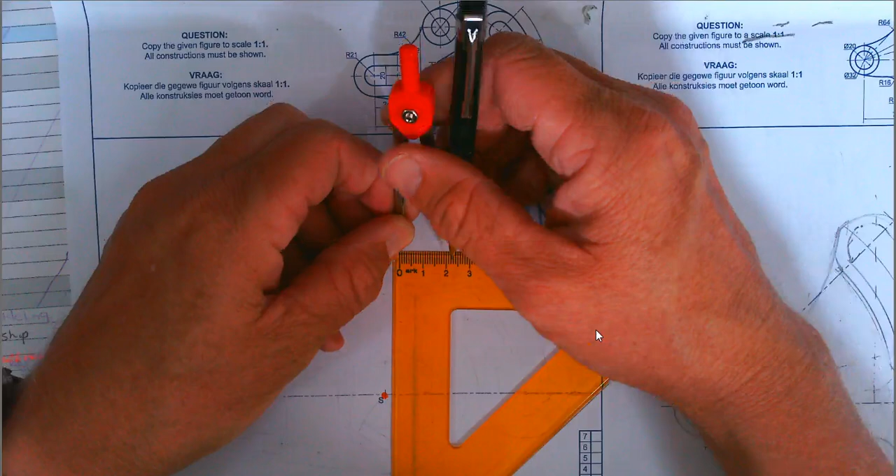Okay, not any other measurement. It must be 25. Okay, that's how you draw a hexagon. Okay, so put my compass there, draw a circle, construction line.

Know this construction, then it needs to start there on the tip. Okay, or at the bottom. So I am going to need a center line here. Guys, you have to mount this on your drawing board. Just for the space that I have here, I don't use a drawing board, but I use 2 triangles. But you have to draw this on a drawing board.

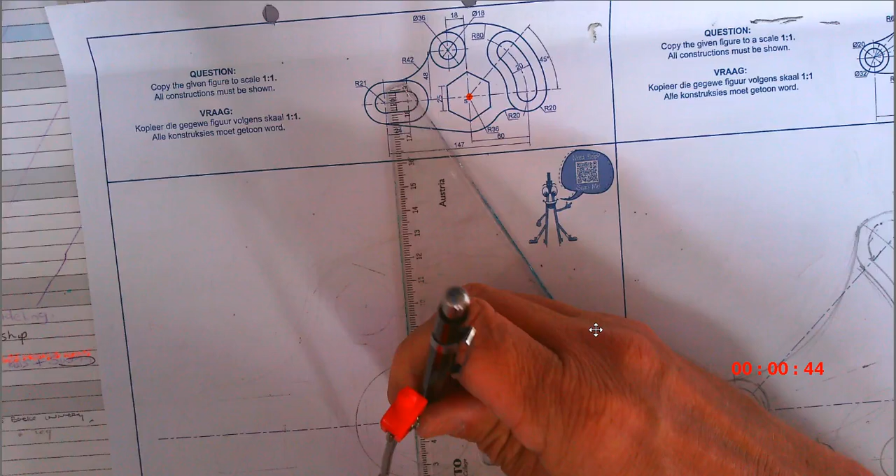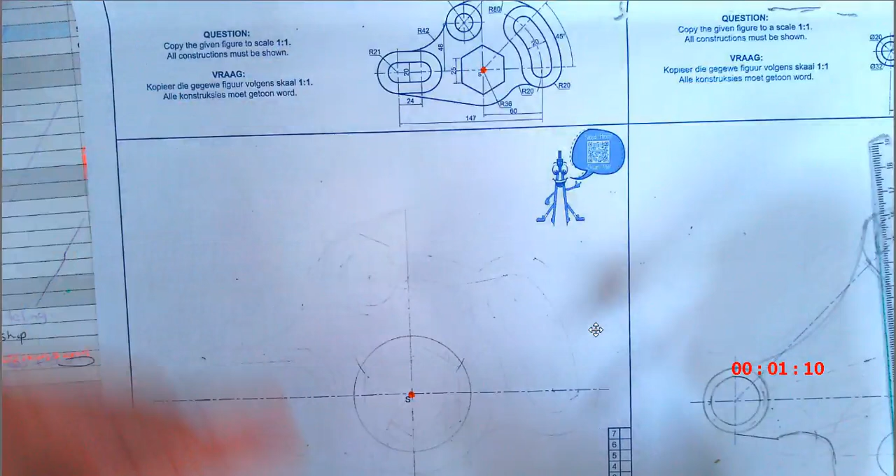Okay, so I'm gonna draw a center line there. The center line is always your reference line. That's where you draw from. Okay, now I'm going to keep it on the same radius, 25. I'm going to put it at the top, mark off at the top and at the bottom. Look there. Put it. You can measure from that line or you can measure from the bottom.

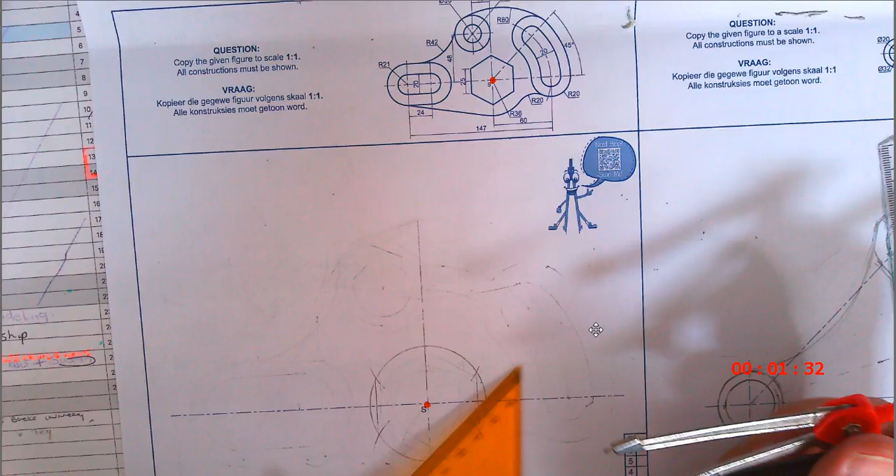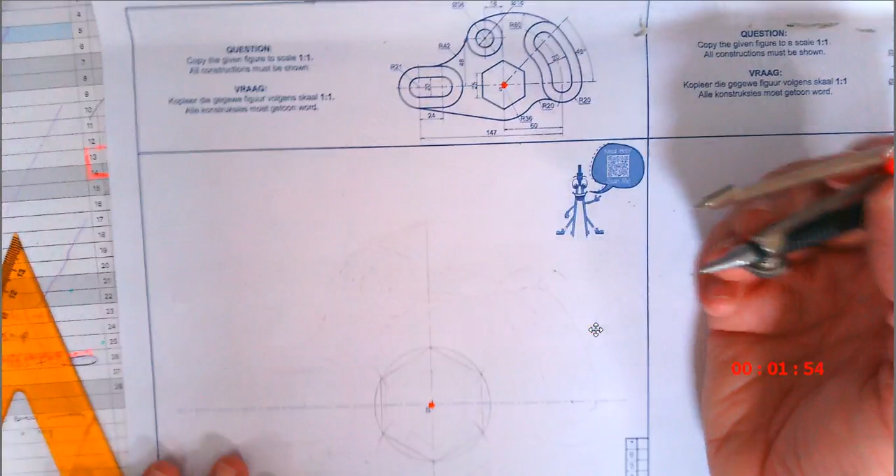Okay. And I'm going to draw a bit quicker. Here's the hexagon. Okay, this is my hexagon. Daar's my 6kant, nee.

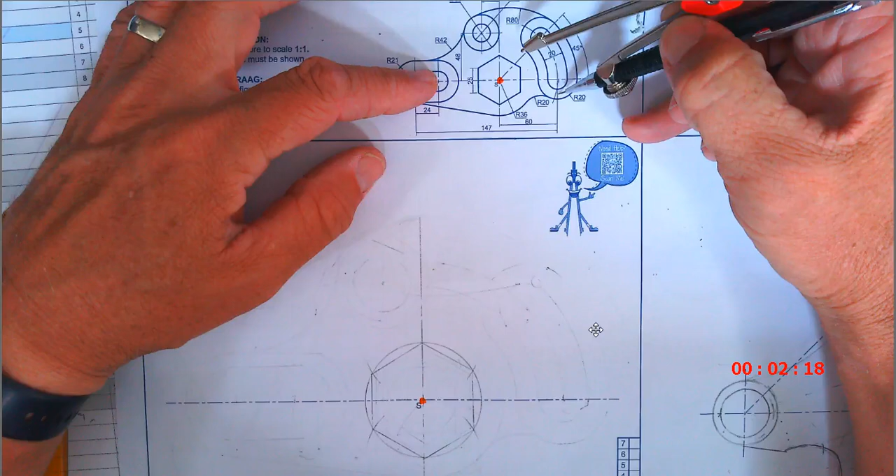Goed. Nou, die volgende ding is you can start now more than one place. I'm going to find that point there. Now they tell me this is 60 millimeters away, so you don't have to guess. Put your ruler there, measure 60. That's your center point. Now, they tell you that there's a center line that runs all the way up there. It's not a specific length, but that is going to be also 60.

So I put it there, open it up on that line, and I draw for myself a long, short construction. Well, not a construction, but a center line. Okay, I have to draw that. Okay, then they tell me that this circle is R20. That means radius 20. From there to there it's 20. And the center one is 20 wide. So that if it's 20 wide, this will be 10 and 10 and 10.

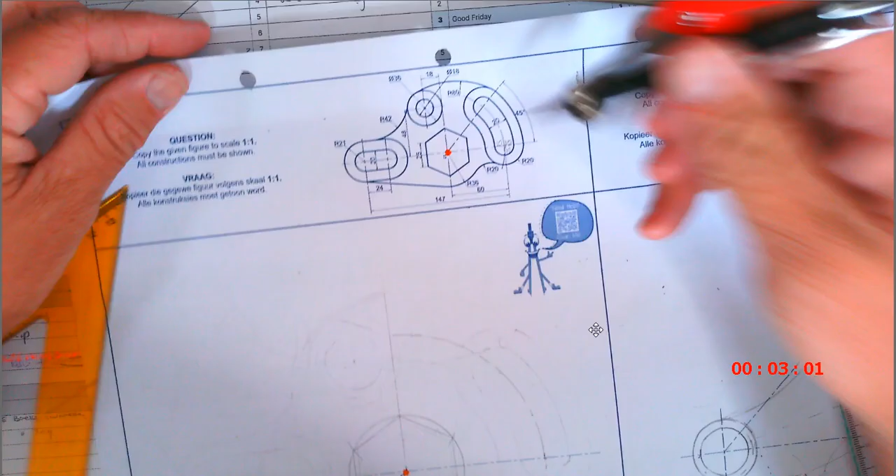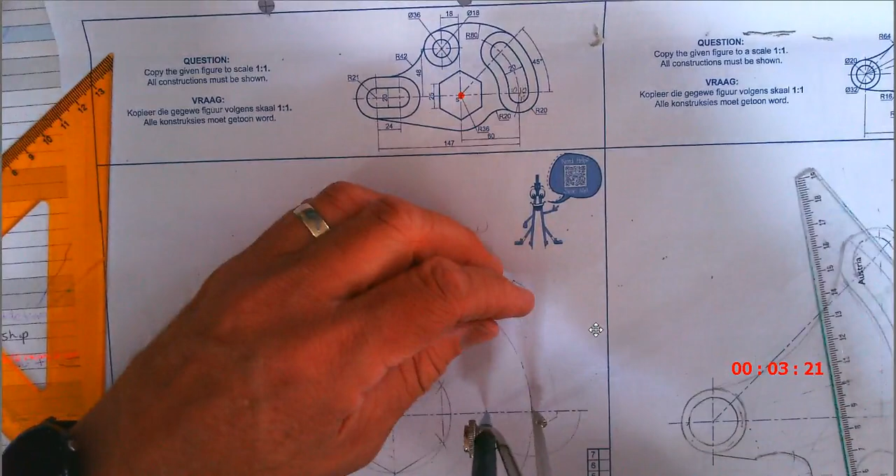Okay, so let's first do the radius 20. Kom ons trek eers die radius 20. So there's a radius 20. Okay, radius 20, daar's hy.

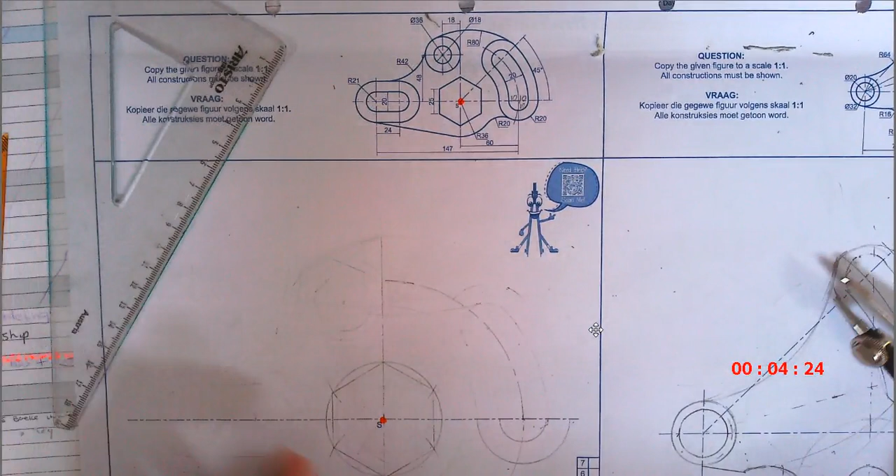Now, so I take my 45-degree triangle. I'm going to put it on my ruler. Okay. Let's do it this way.

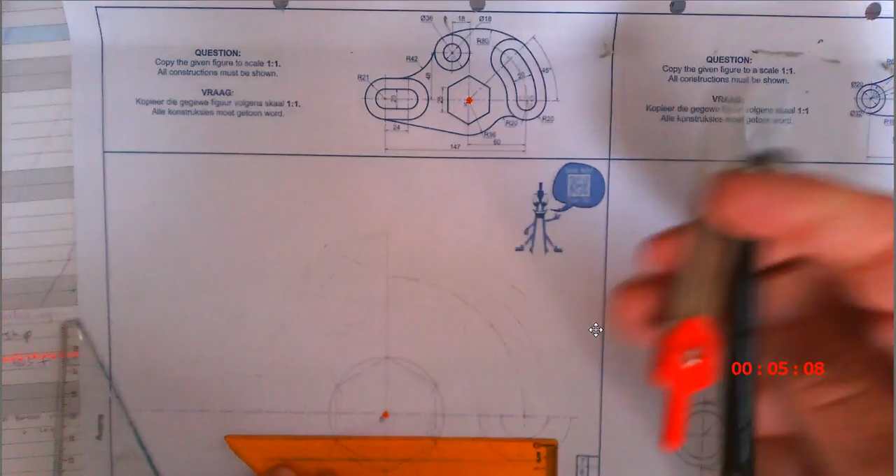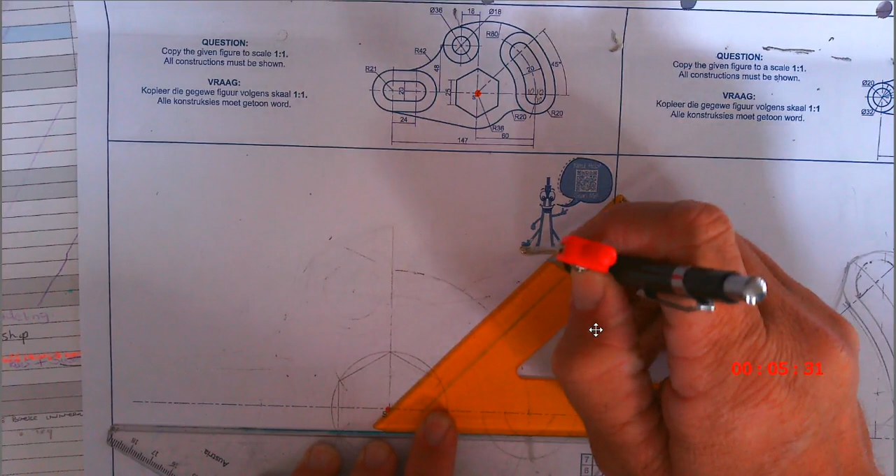I don't have a triangle, or a ruler like you guys have on here, so I'm just going to make a new accurate line for myself here. Okay, 45 degrees from that center point. A center line, long, short line. Okay, so that's where that line is going to intersect. Julle kan dit nou nie sien nie. You guys cannot see that clearly.

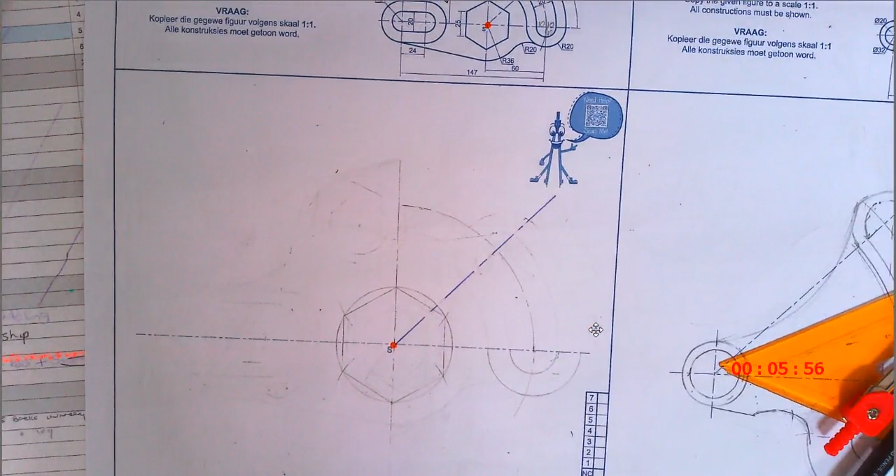I might be able to use a pencil or a pen. Let's use a pen for that line. I'm just going to do it in pen so that it's nice and clear. So there's my center line. Okay, 45 degrees. And now the next thing is the same circle you've got here. You're gonna draw there. Okay, so daar's enetjie hierso. That's why you need that center line.

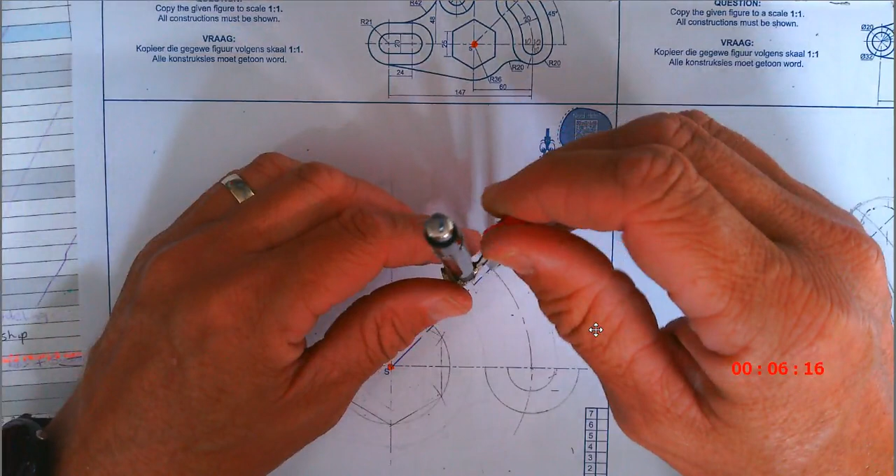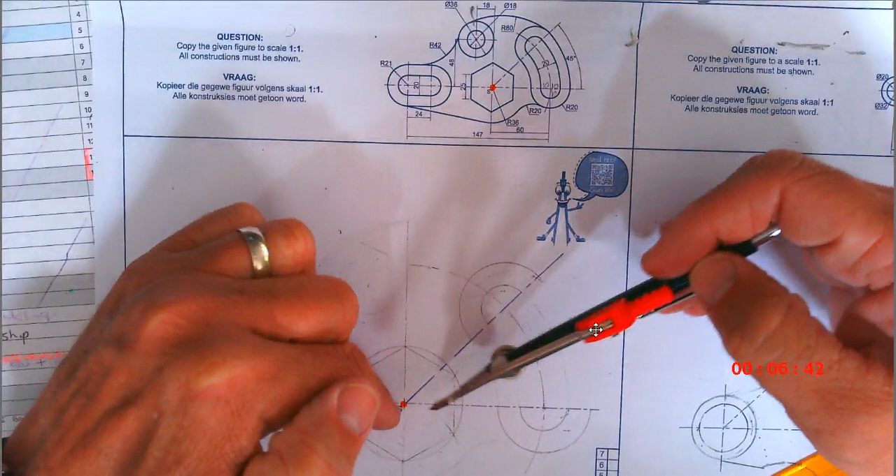And now the next one is the same size as this one. Put it there. Hier is nog niks snaaks. This is just redrawing the given. Nothing difficult about this. Okay, now you need to draw this arc. Now this is very obvious. You're going to be using this center point to draw that arc, this one, and that one. No construction needed here. Sit hom daar, maak hom oop.

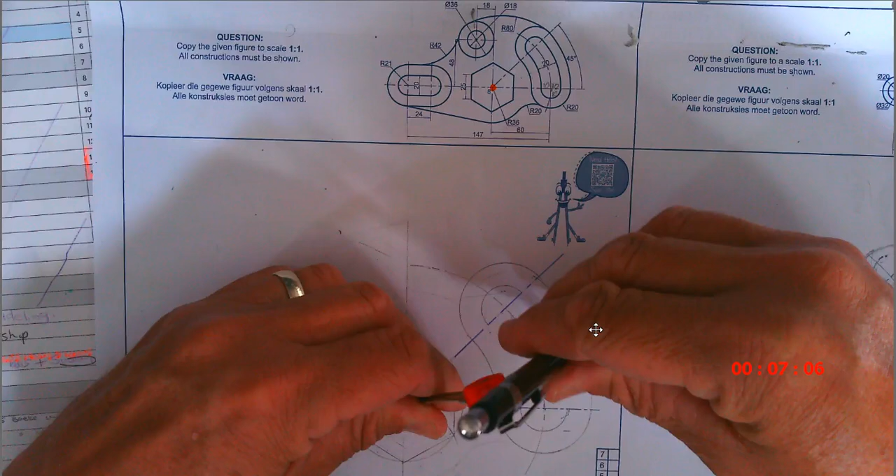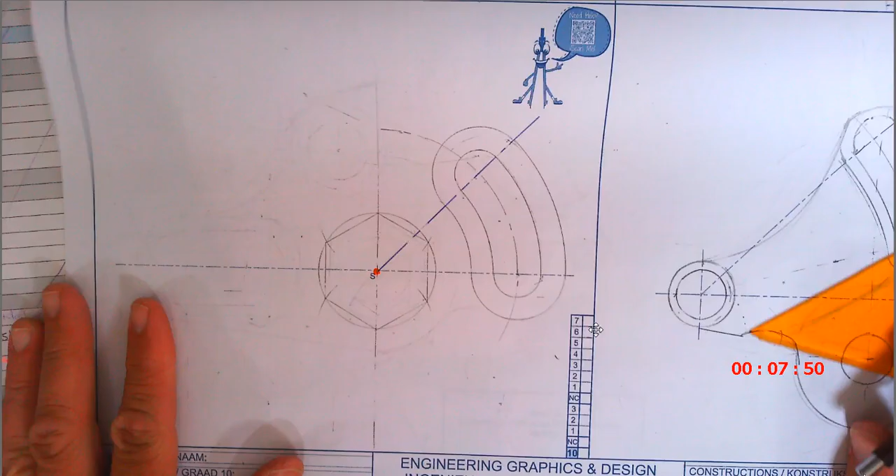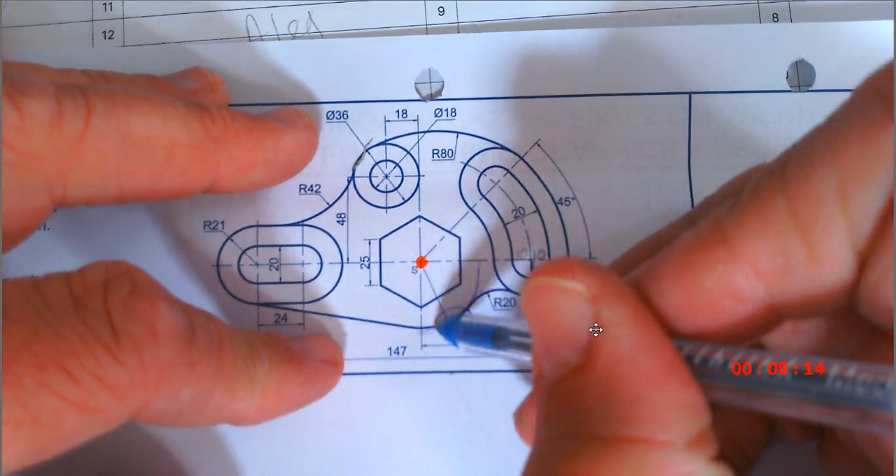Oh shucks. Alright. Okay. So that also is my eerste deel. There's nothing difficult about that. Okay. Let's quickly look at one other thing. On the construction here, they tell me, nou moet julle gou kyk, that circle radius from there to there, that is 20. Okay, then I need to draw another circle here, which is radius 36. Let's quickly do that. Open it up on radius 36.

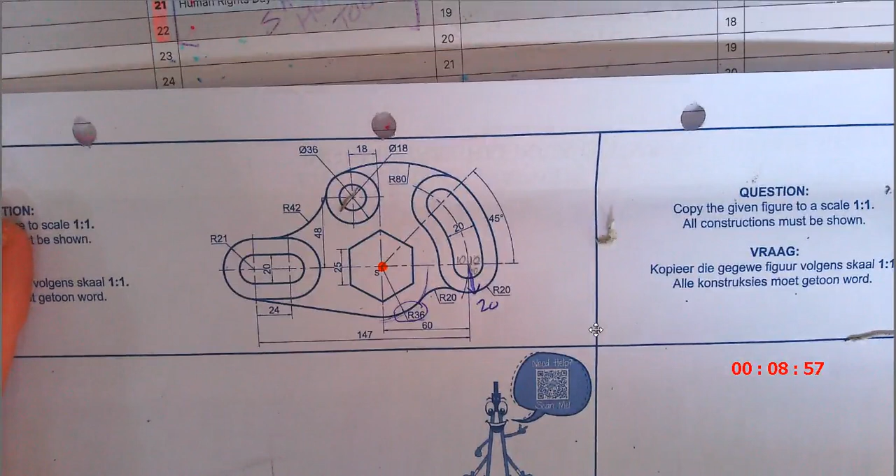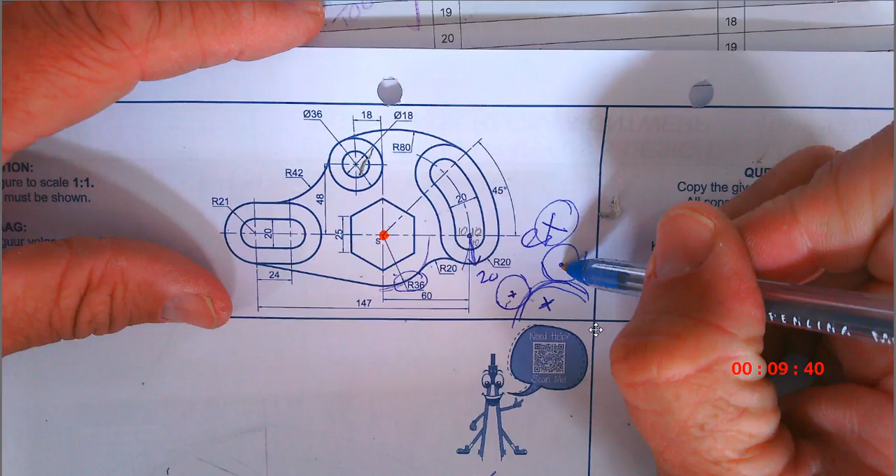What is this? I've got a circle here, circle there, circle there. That is external. The X reminds you of plus. What are you going to plus? Going to use that center point because that's this circle. You're going to use this center point here because that is that circle. And then you're going to find the center point for this circle, which is that one there.

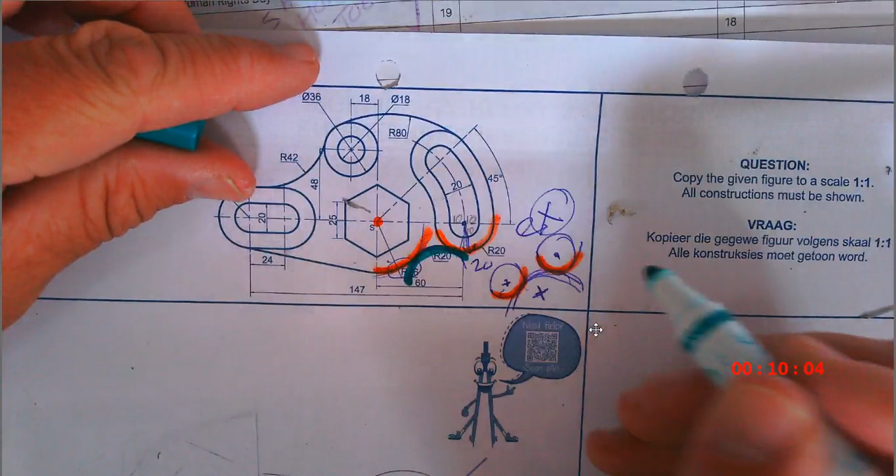I'm going to say it again. This circle there, those are these two circles. The circle that is lying in between, this one, is that one there. You see it? Okay. Alright. So now what am I going to do? I'm going to add. What am I going to add? Radius 20 on the one side to that 20 there. On this side I'm going to add 20 to the 36.

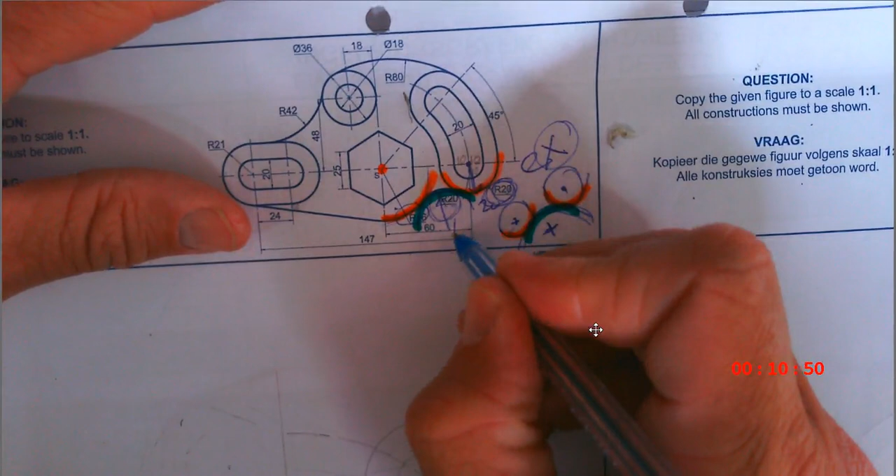So this is what you need to do. So I'm going to be using this point here. I'm going to be using that point there. This is 36. That one. This one is 20. So I'm going to have to add 20 plus. What is the radius that fits in between here? It is also radius. What do they say there? That circle is radius 20. So here you're going to say 20 plus 20. This one is going to be 36 plus 20. What does that give you? 56. This side 40. Okay, so what will I do? I set my compass to radius 40.

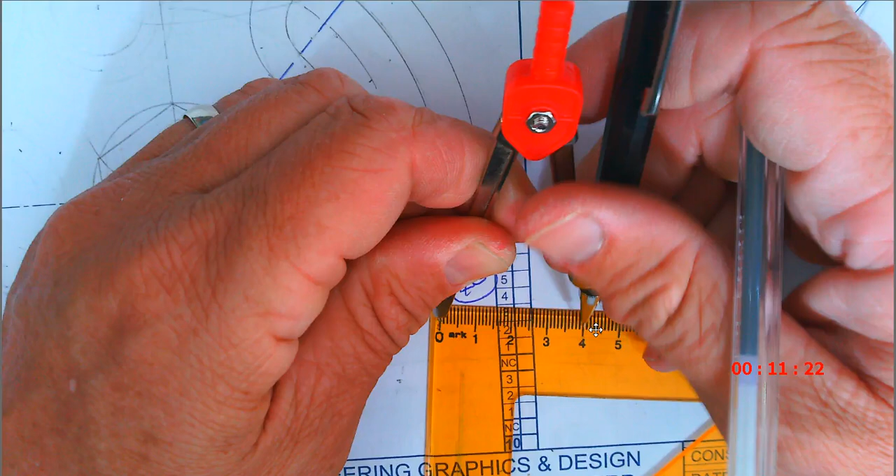Okay, there we go. Radius 40, put it in the center, and I draw an arc. I draw a nice and big arc because I don't know where it is. This one is 56. Now let's quickly find 56. Put it on that center point there. Draw the arc. So now this arc here, if I draw that to the center point, this is 56.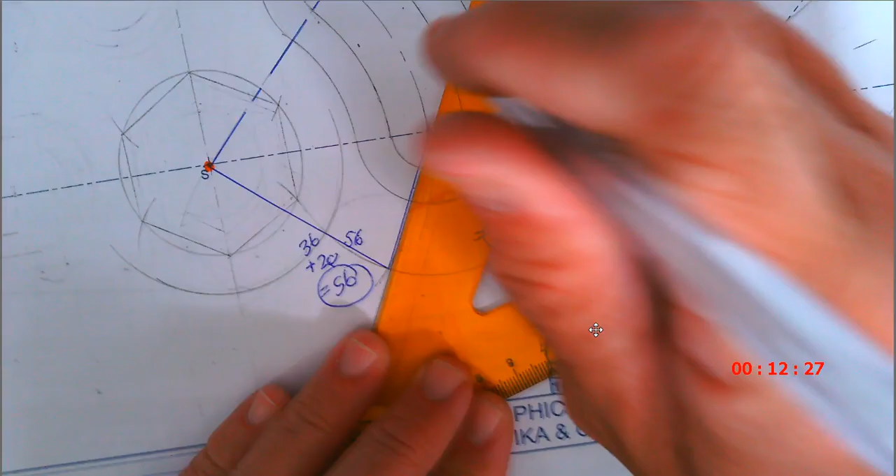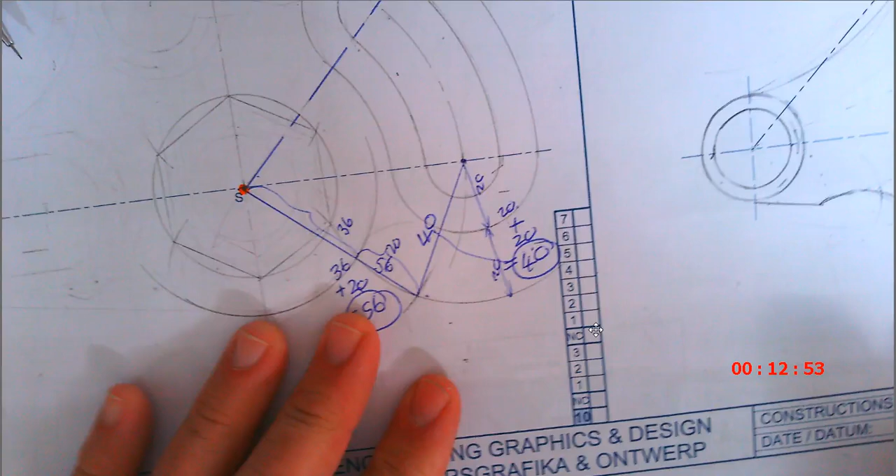If I draw an arc from here to there, how far is that? How far is this? 40. Where do I get it from? 20 plus 20. 20 plus another 20. This one is 36 plus another 20, which gives me 56. Okay, that gives me a point there. If I now put my compass here, kyk hier so julle.

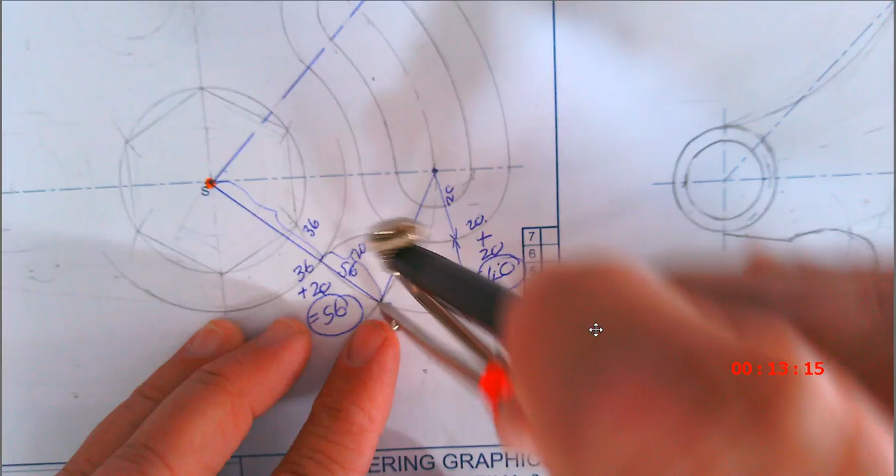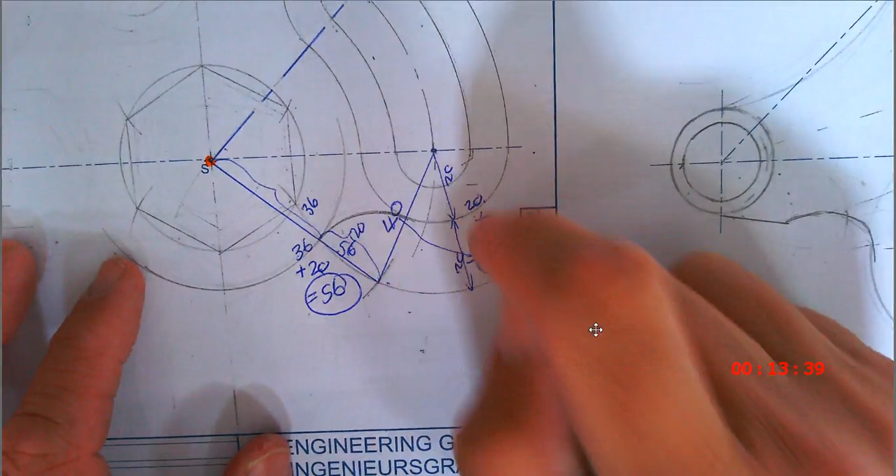I don't have to guess. How do I get it? By adding. I use those two center points. Why did I use those two center points? Because that's a center point for that circle and for that circle. Now there's one more circle at the top here. Let's quickly find that one. Daar's hy. Let's quickly draw this arc and that circle. We're not going to have time for much more.

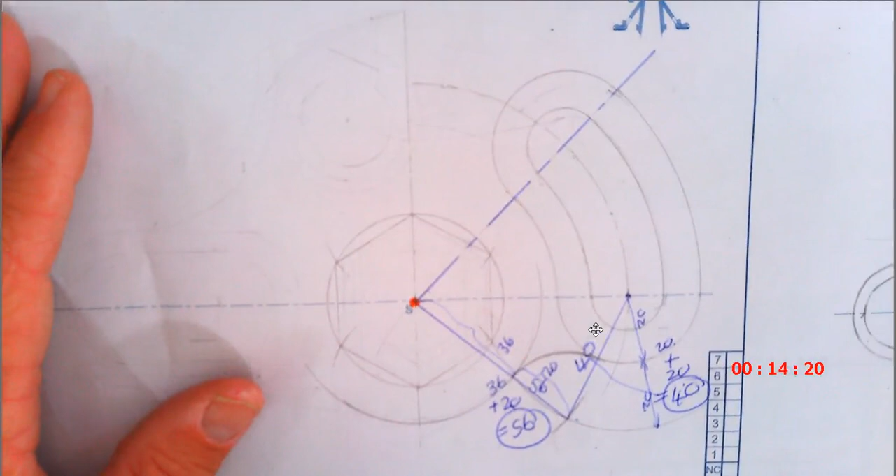Nou belangrik, this is diameter 36. That's 36 from there to there. So that is radius 18. Hoe kry ek sy middelpunt julle? Ek gaan 48 op, 48 up, and 18 from that line. So 18 in, 48 up. Kom ons kyk gou. So I'm going to take that. 48 up. There's 48. And 18 in.

Okay, so ek gaan vir myself hier, I'm going to do a little 2 lines there to find that point. Net 'n center lyntjie trek hier, or construction line rather. Dan vir my hierso nog 'n konstruksie lyntjie trek.

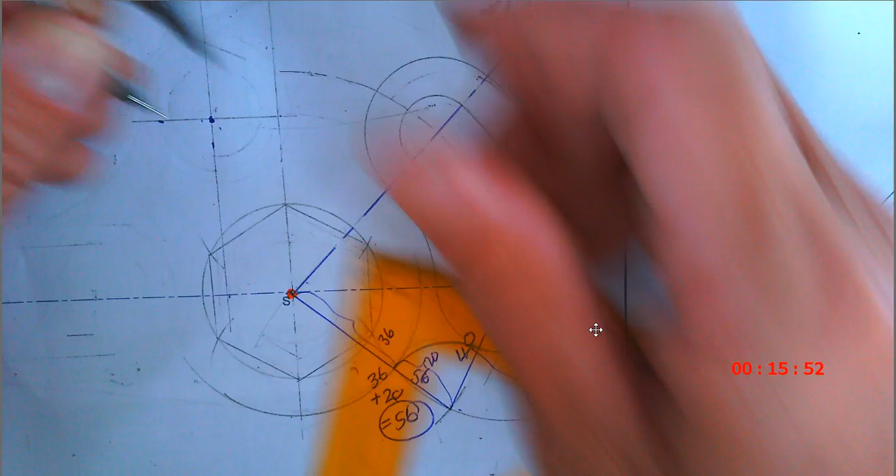Okay, so daai punt, this is the point, 48 from the bottom and 18 from the side, and this is now that circle, that needs to be radius 18. Kom ons doen gou daai. Doen hom gou vinnig. Sit my passer op 18, not 36, on radius 18. Put it there.

Okay, trying not to get my hand in the way. So there's the arc here at the bottom.

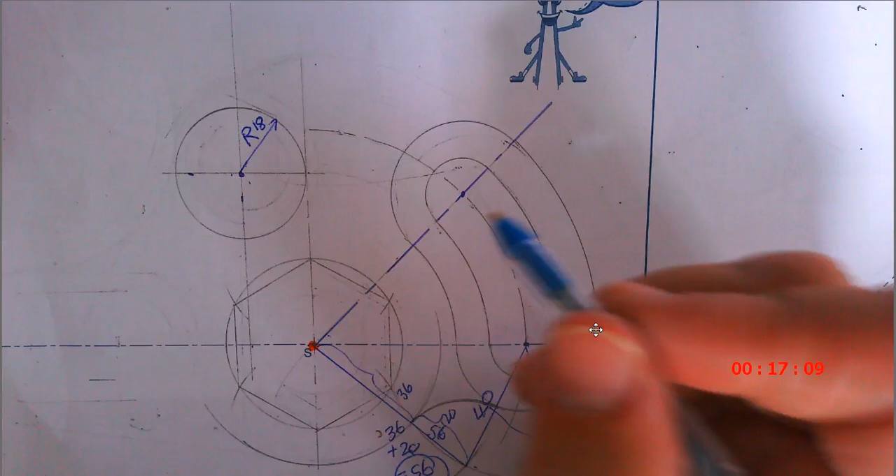That will be radius 20, correct. If you don't know, just go and measure it. So that is radius 20.

Okay, I've got a question. I've got a circle here. Is it included or excluded? Kyk gou daar. Here's the one circle. There's the other circle. Is the one on the top, is that included or excluded?

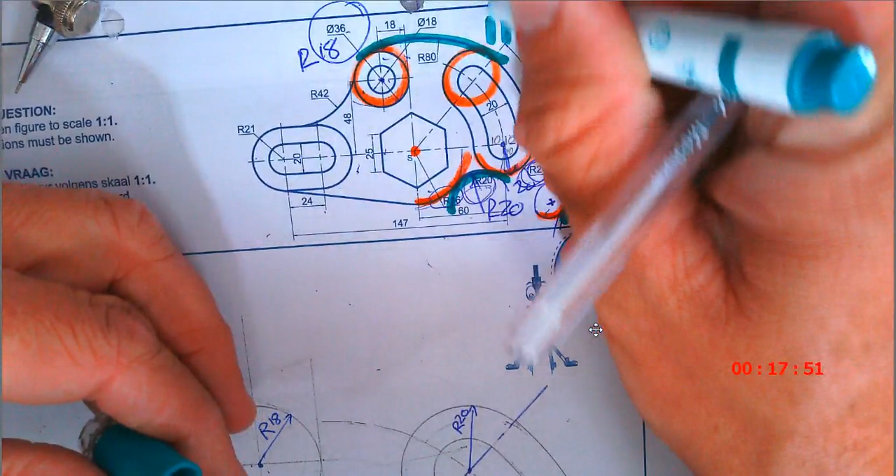That circle, the radius 80 circle, is it including the orange ones or excluding? Including. Including is a minus.

Okay, so wat gaan jy doen? You're going to say, what must I minus? The 80 minus the 18. And the 80 minus the

20. Okay, so here this side it's going to be 80 minus 18. This side is going to be 80 minus 20, which is of course 60. 80 minus 18, 80 minus 20 is 60. Met nog 2 by, so this will be 62. My calculation is correct, 62 millimeters.

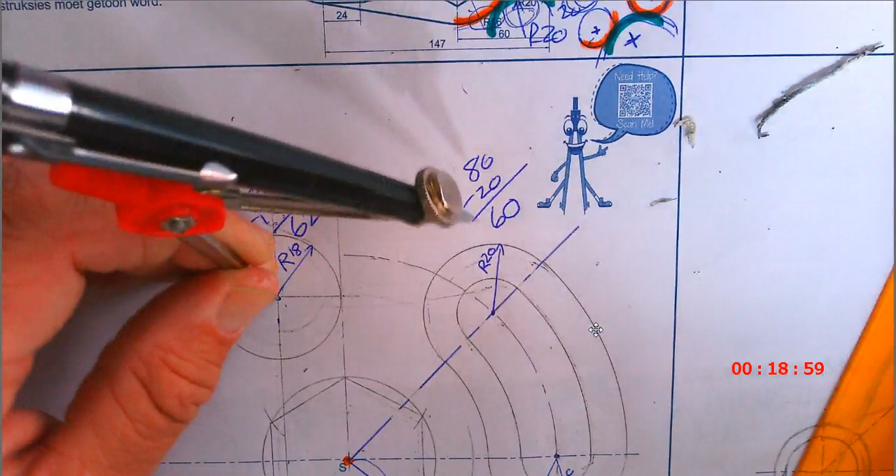Kom ons kyk gou daar. Take my compass, passer, set it to 62. Guys, what's the worst thing that can go wrong? It can be wrong, and then you just go and have a look why it's wrong and you fix it. If it's not the one, it's the other. So if you did the wrong calculation there, you cannot remember, try the other one.

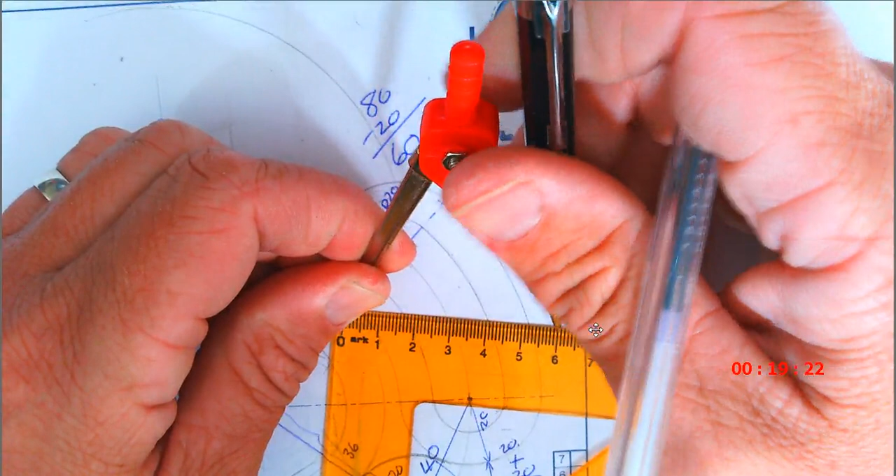Can you use that center point? Waar die twee mekaar ontmoet, maak 'n kolletjie, trek 'n lyntjie soontoe. Kom trek ek daai lyntjie, dan kan ek sien waar hy gaan sny. Trek ek enetjie hiernatoe.

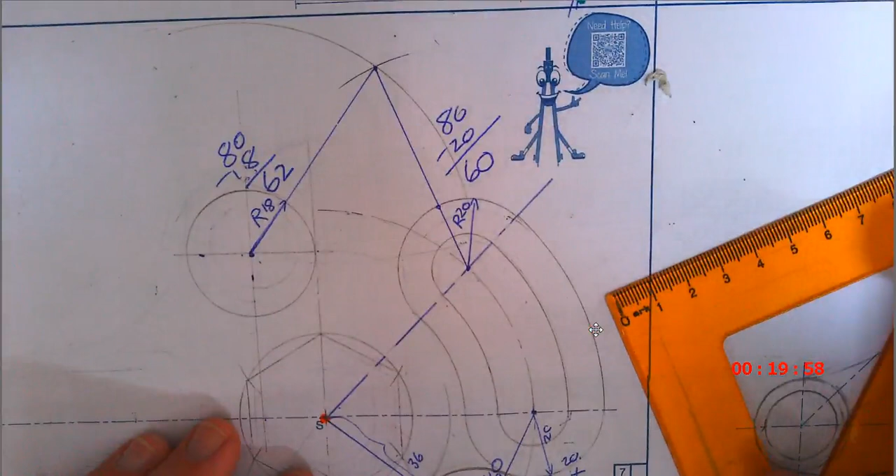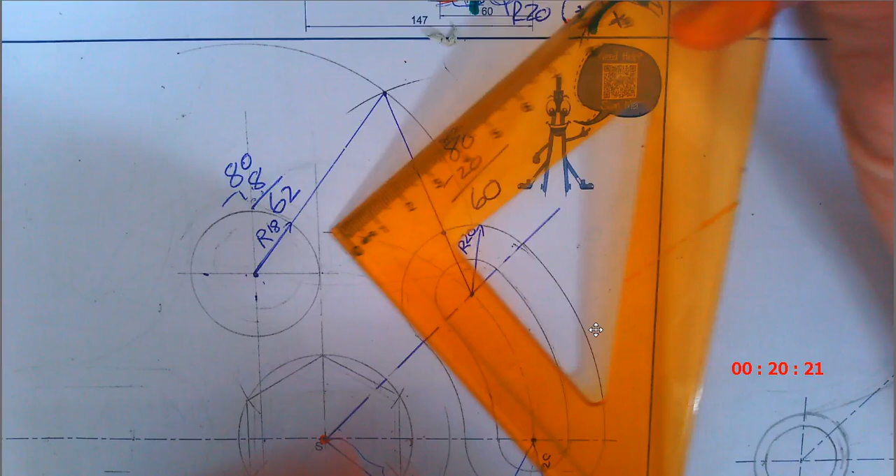Nou, wat het ek nou verkeerd gedoen? 80 minus 18 is 62. Kom ons kyk gou. Daai enetjie is uit. Wat het ek verkeerd gedoen julle? What did I do wrong here?

Yeah, I put it on the top. It should be at the bottom. Okay, so that was my mistake. This must be 80 minus 18. It's still right, but the 62 must be at the bottom. Made a mistake there.

So I'm just going to draw an arc here at the bottom. Excuse me, sorry about that. Okay, and the other one is going to be 80 minus 20. That's 60.

Put it on that point. That's why it wasn't working out. So there's my point where the two arcs meet one another.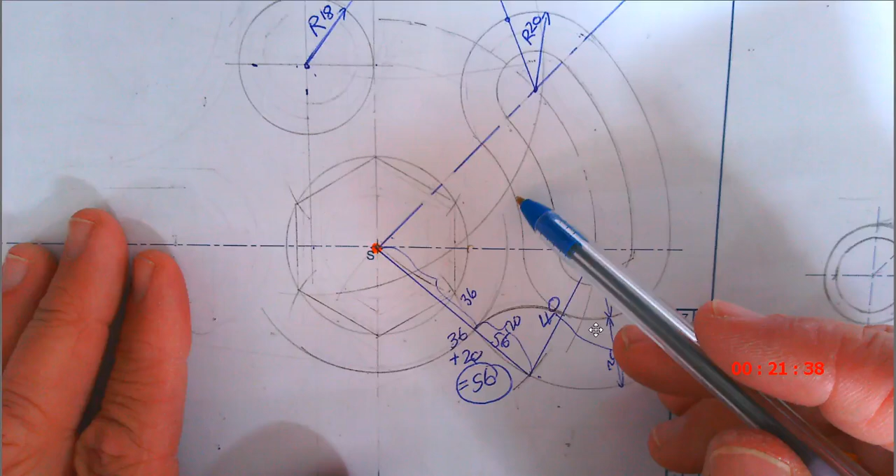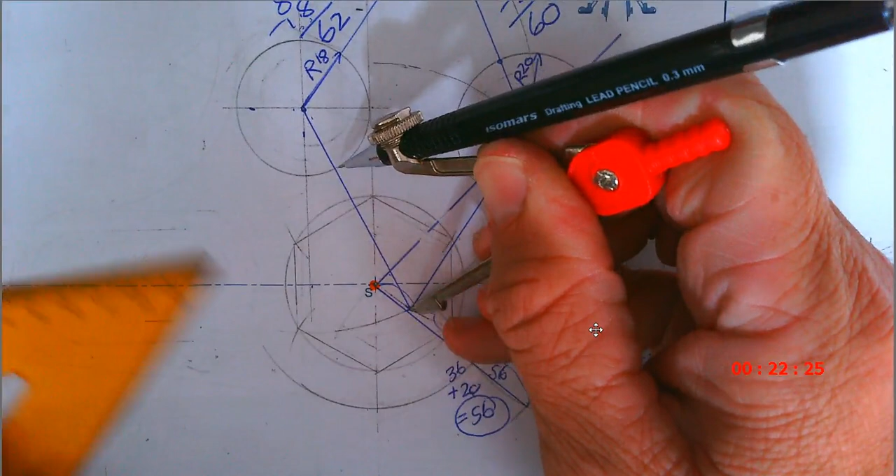Open it up now to that circle there. This should be, if I measure it accurately, this should join up, sorry, not with that one, but with a circle at the top. I want to show you something.

If I draw this line all the way through, okay, then it's going to cut there at the top. If I draw this circle or this line all the way through, it's going to meet up right there.

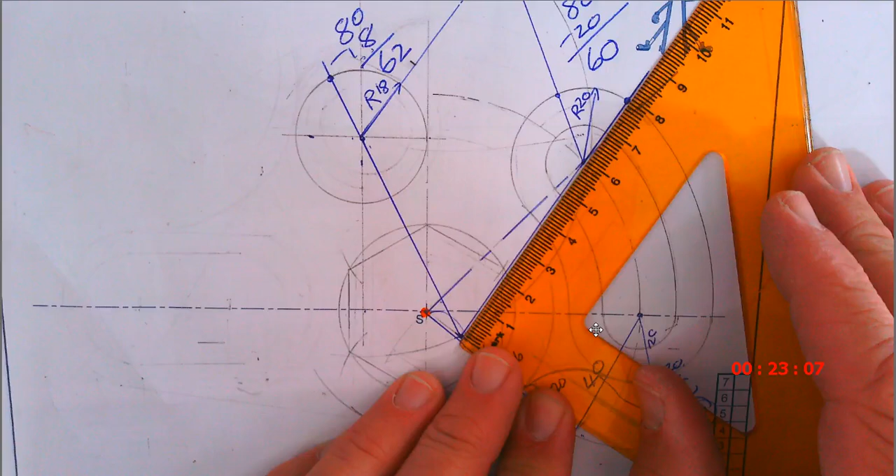Okay, so that distance must be 80. You can see it is from that point. If it's not exactly 80, means we worked inaccurately. That one also needs to be 80. It is. Put my compass there.

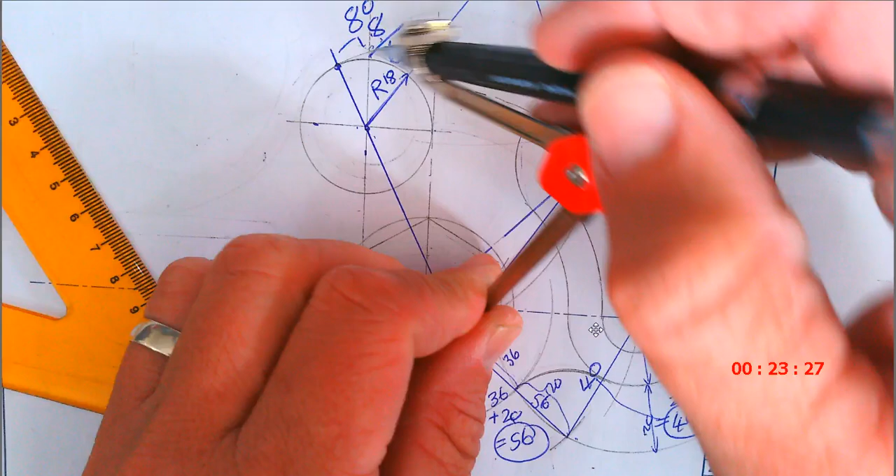Open it up onto the point at the top, to the point on that side, and there's our arc. I can see that mine is slightly off on the one side, so I'm going to keep it on 80 and I'm just going to make a new arc here.

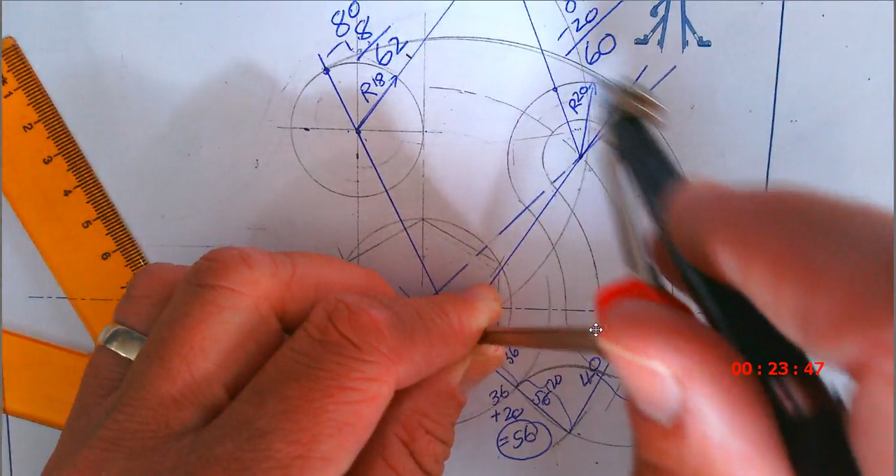It seems that my compass slightly moved. Just going to put it there. It's still 80, but now it's joining up as it should. It's just the accuracy issue there.

So if you get that the circle doesn't meet up where it's supposed to, it could be that one of our circles is slightly smaller.

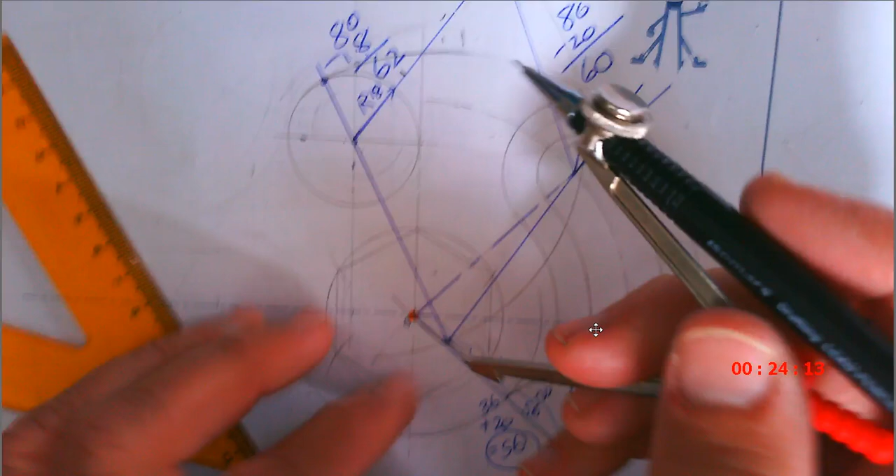I see that it actually was supposed to end there, so it wasn't wrong. It was supposed to end over here. So it was actually on point. Yeah, it was actually on point where it should have been. This circle was slightly out.

Okay, did you guys get that method? Okay, so I think if you can do this, you can do all of them. This is how all these drawings work. What's important is find the center points of the circles. Check if it's including or excluding. And yeah, just draw all your reference points given to you.